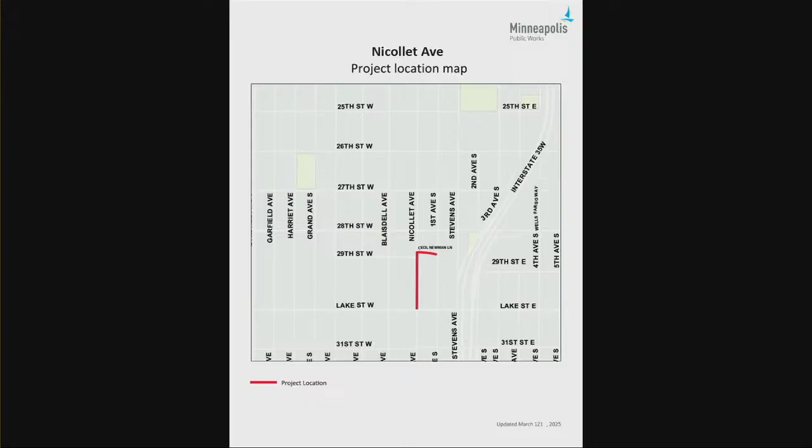City staff has conducted numerous outreach activities throughout the planning and design of the project. A virtual pre-assessment meeting to provide an overview of the project, discuss plan improvements, and answer questions related to the assessment method and process was held on April 1st. Today, Public Works is asking City Council to pass resolutions ordering the work to proceed, adopting the special assessments, authorizing sale of assessment bonds, and authorizing abandonment and removal of areaways in conflict with the project. That concludes my presentation, and I'll stand by for questions.

Thank you so much, Mr. Hayo. I do have a couple of questions about the special assessments in the amount of $425,318, as well as requesting from the Board of Estimate and Taxation to authorize the city to issue the sale of assessment bonds in the same amount. Can you explain a little bit more about how that reimbursement process works?

Welcome, Mr. Handelin. Thank you, Chair Cashman, members of the committee. My name is Jeff Handelan. I'm a principal professional engineer in the Transportation Engineering Design Division of Public Works. So, for the questions about the reimbursement...

For special assessments funding, we work with Finance and Property Services Division of the city. My understanding is that they sell bonds. We coordinate with them so they know our assessment amounts. Then they sell bonds because we have to fund the construction now; we can't wait 20 years for the assessments to be paid. The property owners pay their assessments through Hennepin County property taxes, and that goes from there to the city.

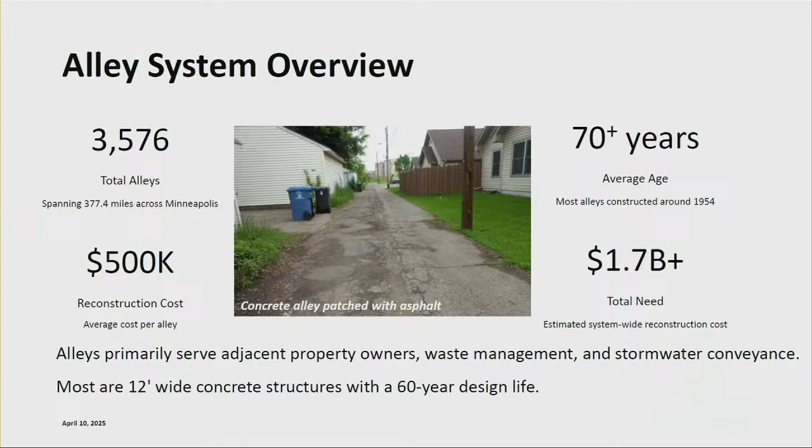Since the alleys are fairly uniform, the problems on the alleys are pretty consistent throughout the system. Most alleys have exceeded their useful life. Cracking and heaving of the concrete panels is common. Asphalt overlays have been used to correct some conditions, but are not an effective tool for all the issues on the alleys. Currently, the combined total of funds available for this work is $470,000, which I'll talk about a little later on.

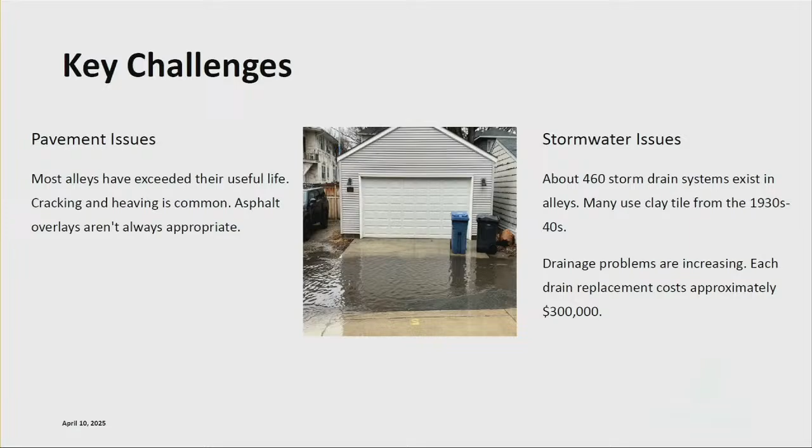Sometimes an alley condition exists because of stormwater drainage concerns. There are about 460 storm drains in the alleys, representing about 13% of the alley system having a storm drain. These storm drains were primarily made from clay tile in the 1930s and 1940s and are in deteriorating condition. Each drain replacement costs approximately $300,000.

I got this slide ahead, I apologize. Public Works directs all complaints about alley conditions to 311. This includes complaints coming from private operators, residents, council members, and staff. We'll talk a little bit more about 311 at the end of the presentation, but it's important to know that the repository of alley needs exists entirely based on 311 data.

After a complaint is received, Transportation Maintenance and Repair and Surface Water and Sewers will evaluate the cause of the issue and make a repair decision. There are a wide variety of treatments that may be used to repair an alley, ranging from sweeping, patching, asphalt overlay, stormwater repair, or in some cases, a full reconstruction. Funding is allocated based on available resources, prioritization data, and equity considerations. However, given funding constraints, the department may not be able to address each request at the scale needed.

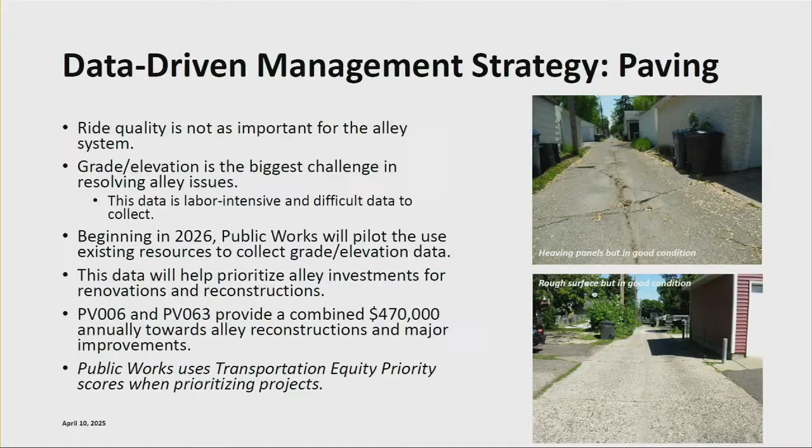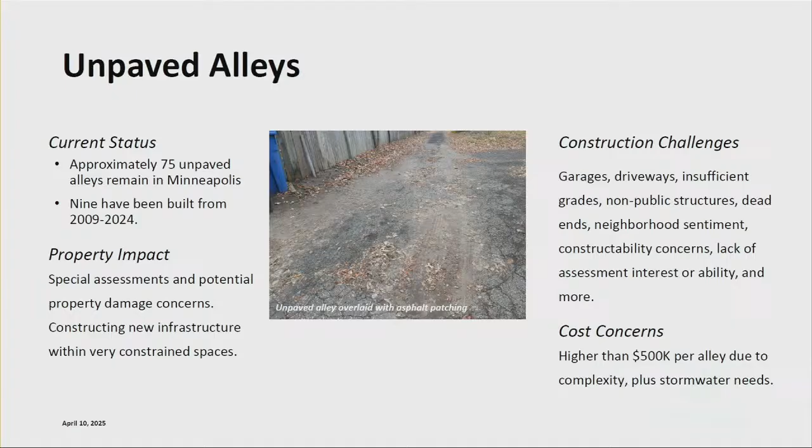Public Works has engaged a multidisciplinary team since 2024 to change the process of compiling and summarizing 311 complaint data. New categories have been added to 311 to route complaints to Public Works subject matter experts appropriately. This data is collected and updated each week. This routing will better illustrate the needs on the system and provide information back to the original 311 caller. However, if an alley is determined to need more than a resurfacing, it may be marked as unable to resolve as the needs exceed current available resources.

I worked with the clerk to add another slide, but I didn't get it added.

That concludes my presentation. I'm happy to take questions from the committee.

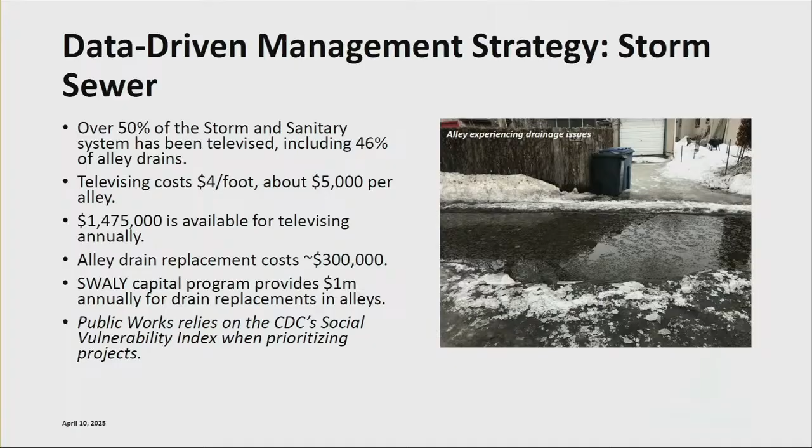Chair Cashman, members of the committee, thank you for that question. The 1.4 million in televising is just televising, not actual repair. And so it's closer to $1 million than 2.4. So it's 1 million for repairs. Correct, so I just want to make sure I keep them separate. So if we're just thinking about replacement and repairs, it's 1 million. Okay, thanks so much, I appreciate it.

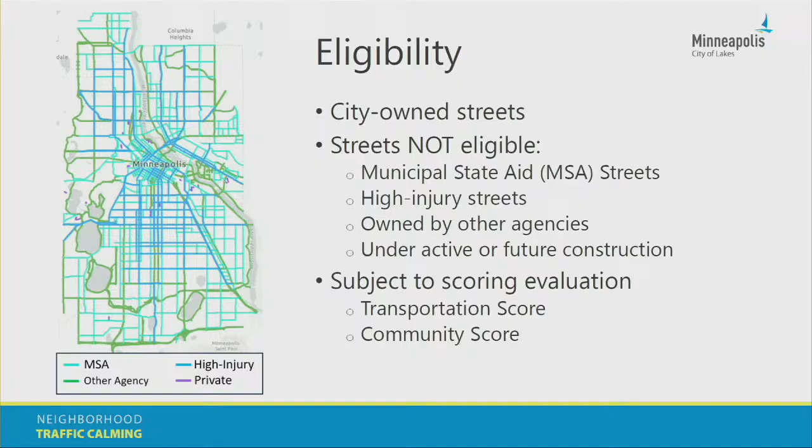The current generation of the program will enter its third season of construction this year. To break down the requests we've received and been able to construct over those 3 years, or planning to this year: in the first year of the program, we received about 750 requests, of which 590 were eligible for construction, and our budget that year allowed us to include about 40 requests in a project area.

In the second year of the program, we received an additional 270 requests, 120 of which met the criteria to be eligible, and last summer, we constructed projects which addressed about 50 requests.

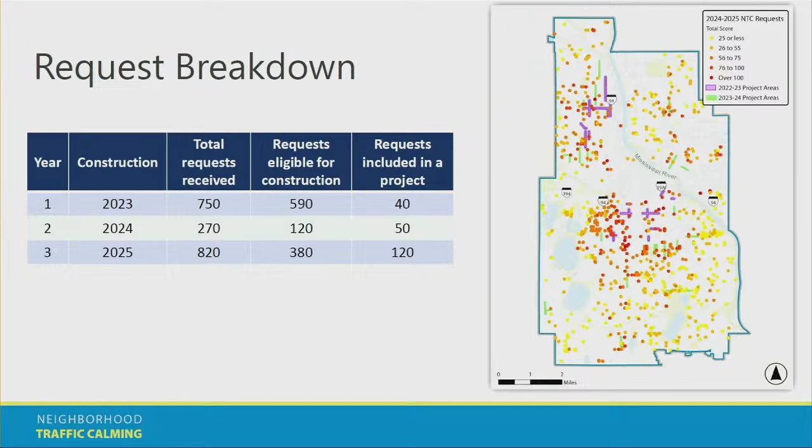Leading into our current cycle, we had a pretty strong surge of engagement and interest last year, which resulted in over 800 new applications, 380 of which met all eligibility criteria. This year, we plan to be able to construct enough treatments to address about 120 of those requests.

That brings us to some exciting and timely news that we're moving ahead with our proposed project areas for this year's construction. This year, we plan to construct 49 projects. Again, a project is a localized stretch of a couple of blocks receiving some traffic calming treatments, spread across all 13 wards.

We've selected the locations of these 49 projects based on the requests we've received and are moving forward into the engagement phase for this year's work. Next, we'll be soliciting feedback on these projects from residents to inform what particular traffic calming treatments will be constructed and where specifically within those project areas they'll be placed.

We're now in our community engagement phase, which consists of several open houses over the next few weeks, as well as the chance to provide input using our online tools through May. Following community engagement and input, projects will begin construction this summer and likely continue into the fall.

Looking ahead to next year, the deadline to submit a request to be included in the 2026 construction season will be August 1st of this year.

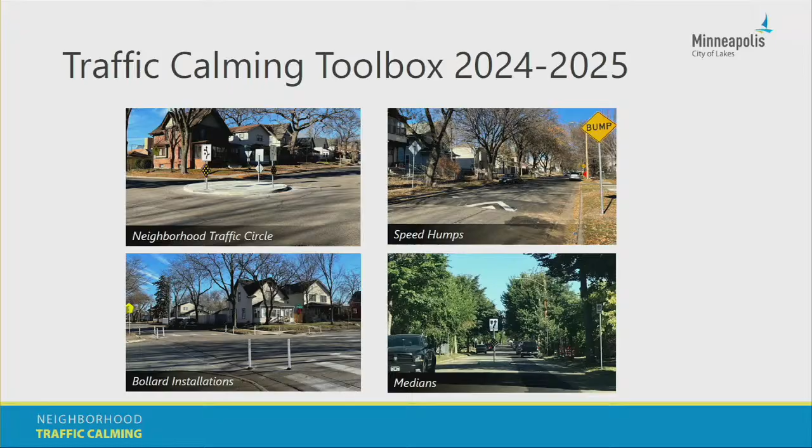Now to the second section of our topics today, we'd like to give an overview of other programs and opportunities in the city which address traffic calming and safety. To answer what are all the projects and programs Public Works delivers that address traffic calming, it's helpful to step back and identify some elements and goals that define traffic calming.

Effective traffic calming comes with construction of some sort of physical measure which can be self-enforcing. For example, a physical measure with a traffic calming effect doesn't have to be exactly a speed hump or traffic circle, but can be a different type of element, like a curb extension or bump out, a median in the middle of the street at an intersection, or simply narrowing the street and lanes, all of which encourage slower, safer vehicle speeds.

A desired outcome of traffic calming is slower vehicle speeds, and sometimes a reduction in the number of vehicles on a particular route or movement. These elements and outcomes have a desired effect, especially in the context of our neighborhood traffic calming program on low-volume neighborhood streets, improving neighborhood and community livability. We also get a proven safety benefit from any of these treatments, which result in slower vehicle speeds.

Some of these elements—curb extensions, medians, narrowed lanes—might sound common and widespread, especially in Minneapolis. That's because these design features, which encourage slower, safer vehicle speeds and calm traffic, are incorporated into so much of what we deliver in public works transportation projects and programs. There are plenty of examples.

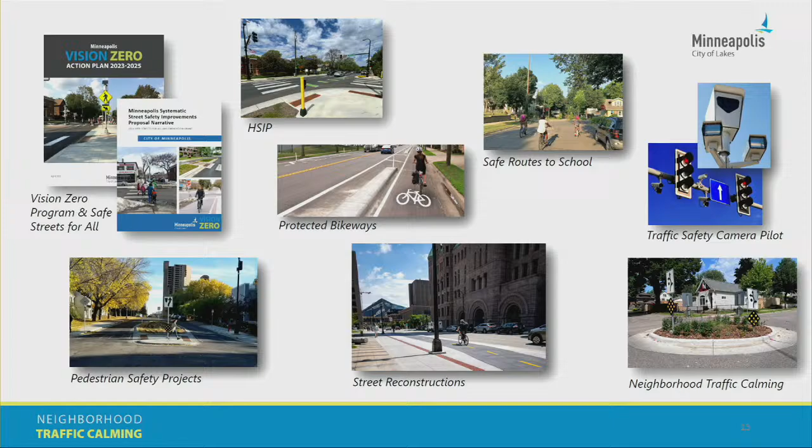The Neighborhood Traffic Calming Program is one area where we focus on neighborhood livability rather than targeting higher volume, higher crash locations like in many other instances. One other program to mention is the upcoming traffic safety camera pilot, which hopes to address traffic speeds more from the enforcement side rather than the physical infrastructure side.

So now we've reviewed the status of the program and considered it in the context of other traffic calming and safety work we do. We'd like to look ahead at some potential updates and opportunities for the future.

Over recent years, as interest in traffic calming has grown throughout the city, we're finding a certain type of request that doesn't quite fit the program as originally designed. Many council members might be familiar with this: it typically involves being located on a municipal state aid street, but not on the network of high-injury streets, and not within the area of an upcoming project like street reconstruction, Safe Routes to School, or an HSIP traffic project. But there's still a desire from residents for traffic calming or safety improvements.

These are still streets where people live, cross the street to walk to the park or the store. They're still part of people's neighborhoods, even if not included in the network of streets where we've been focusing our program. Based on these factors, and our understanding of council feedback around last year's budget season, we're looking to use the program to expand the reach of traffic calming and safety elements to these expanded neighborhood streets.

To accomplish this, we're planning to pilot this year a system to implement traffic safety treatments on this category of streets. We plan to use a portion of the 2025 traffic calming budget to install allowable treatments on MSA streets that meet their design requirements. MSA streets require a different set of design standards than typical neighborhood streets where we install traffic calming, so not every tool in our toolbox would be eligible at these locations.

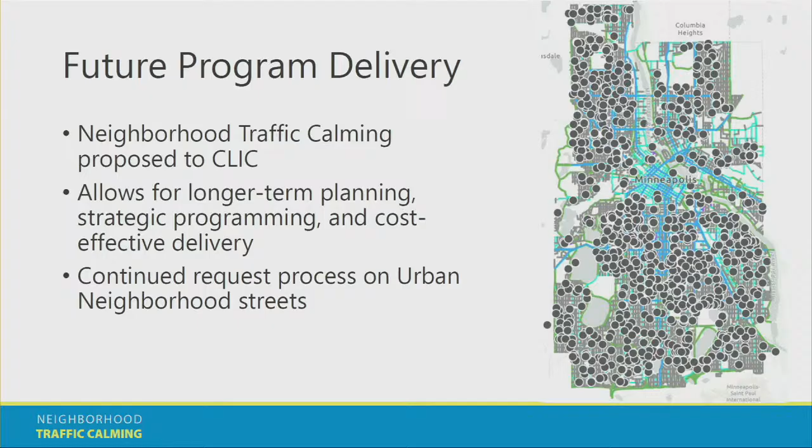Now, don't worry, we're not moving away from the application-based system from residents, but as Ben talked about with some of the other corridors, we can also do more corridor planning, more area planning. We feel it'll give us efficiency for construction and a better system for how we can plan into the future. So again, as we look at the full suite of programs the city has going into the future for safety, we're super excited for neighborhood calming. We know it's a strong facet of the citywide safety approach. We're very excited for this program to continue on into the future. Thank you.

Great, thank you so much, Alan. Thank you, Ben, for the presentation. You guys just made my day and week with your presentation today, because the council has been so invested in this program, tripling the investment we made in it this year in the budget, really just on the feedback from our residents. I myself get dozens and dozens of requests for traffic calming in my inbox. It's just something people really want to see in their neighborhoods, and want to be part of choosing what that looks like, which is why we so support the application form that we have. I did want to ask a couple of questions.

So the first one: in the beginning of the presentation, you said there were 120 requests made this year that will be included in a project, but you said there will be 49 projects. Can you explain that math?

Absolutely, Chair Cashman. So when we talk about a project area, it's sometimes a stretch of a couple blocks in a row, and may include more than one treatment. So there might be a pair of speed humps on one block, and then a couple blocks down the road, there might be a neighborhood traffic calming circle, for example. Similarly, within that couple-block stretch, multiple residents might submit a request to the traffic calming program, so there might be multiple requests included in a single project. That's why the number of requests that can be addressed is higher than the number of actual project areas.